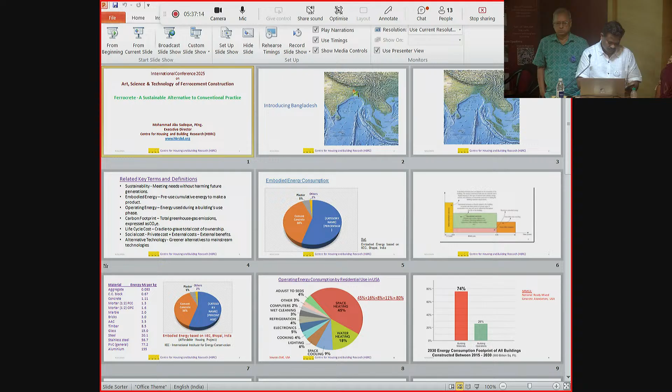Okay. Just in a few seconds, I want to introduce Bangladesh to you. We all know Bangladesh is a small country between eastern India and western India. It's a disaster-prone country, with all types of disaster; what we call a supermarket of disaster, because of its geographical location.

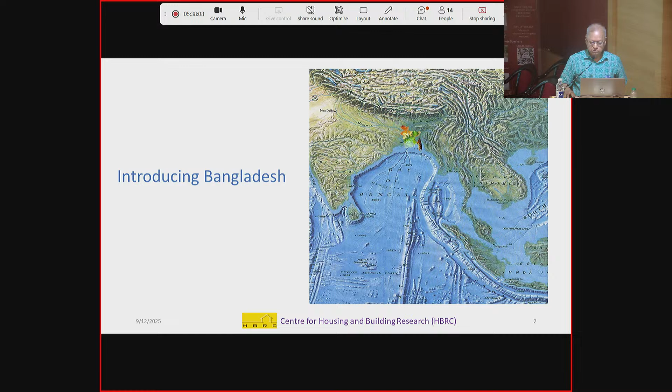You see, this is the location of Bangladesh, and this Ganges river basin, this Brahmaputra river, and this Himalayan tectonic plate boundary all make this small country vulnerable. So actually ferrocement might be the best option, the best opportunity for countries like Bangladesh.

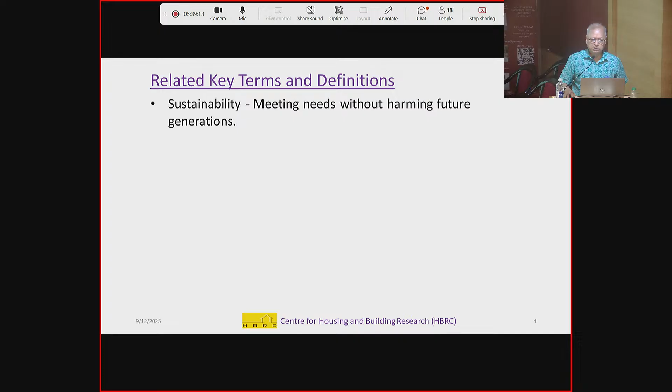Let me introduce and recap some terms and definitions related to this presentation. Sustainability, as we understand it, is meeting needs without harming future generations. We love ferrocement mainly because it is a sustainable technology. Embodied energy is the pre-use cumulative energy to make a product.

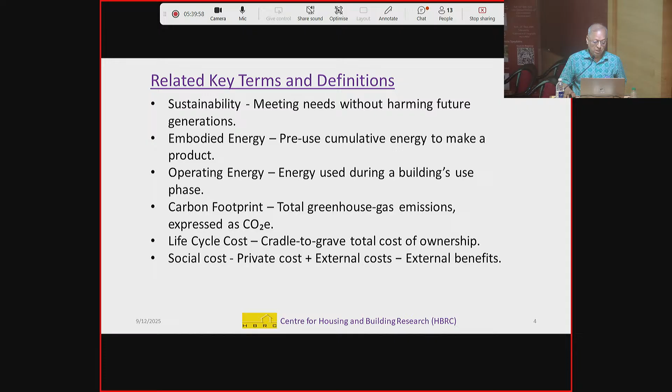Operating energy is the energy used during a building's use phase. Carbon footprint is total greenhouse gas emissions expressed as carbon dioxide equivalent. Life cycle cost is cradle to grave, total cost of ownership. Social cost is the private cost plus external cost minus external benefit.

Finally, alternative technology: a greener alternative to mainstream technologies, because anything different from the conventional one is not alternative technology. Alternative technology is the greener alternative.

So, embodied energy consumption, with an example from Bhopal, India: the Bhopal affordable housing design solutions. Brick contributes the major energy and carbon footprint of a building if we use brick. Cement is 38%, brick is 55%, and plaster and others a small amount.

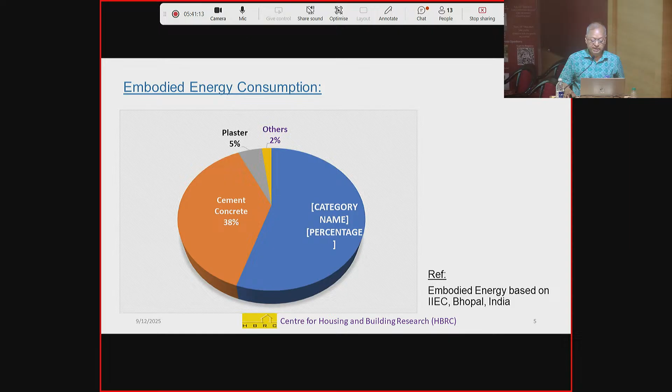Regarding material selection and energy consumption, I believe the architect can play a major role in making a building sustainable. It's not the engineer, it's the architect, because building material selection is the architect's job. The engineer mainly selects the structural system and frame, but most non-structural and finishing materials are selected by the architect. So the architect can play a vital role in making a building energy efficient and sustainable.

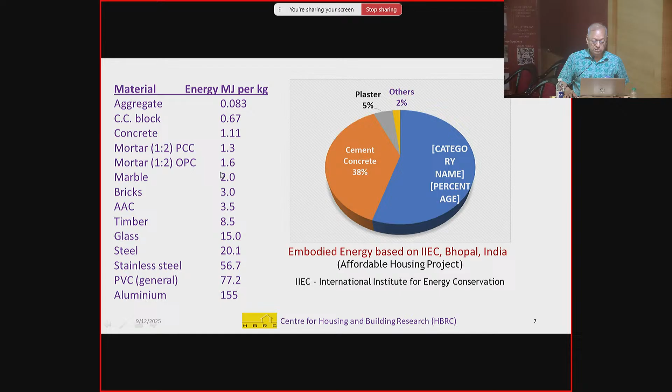So if it is 1:2, the energy consumption is 1.3 if we use composite cement. But if we use ordinary Portland cement, then the energy consumption is more, 1.3 to 1.6, because we know that in composite cement maybe 30%, 35% is fly ash or blast furnace slag, which does not contribute as much carbon as clinker. So considering these things, we have to select our building material and technology.

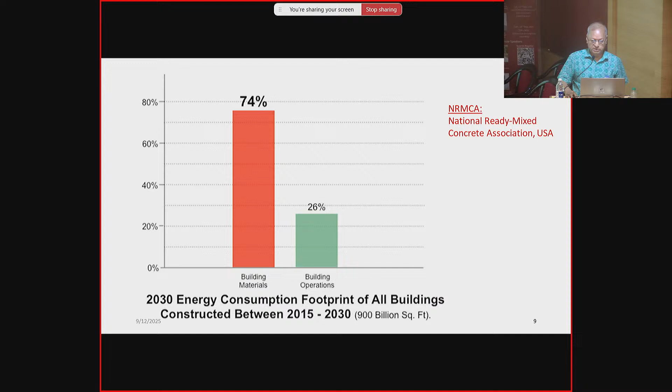And this is from the National Ready Mix Concrete Association, USA: for 2015 to 2030, building material embodied energy is 74%, and building operation energy is only 26%, even in the USA.

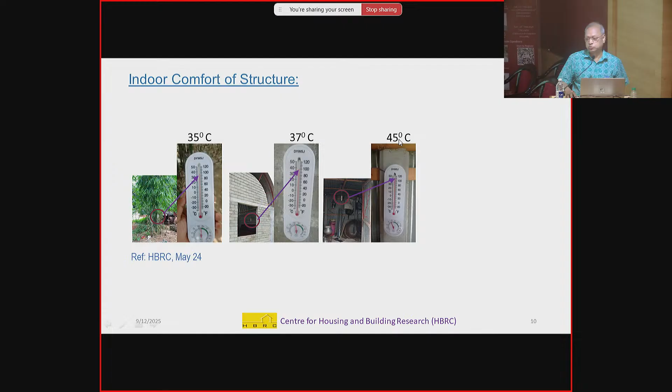Indoor comfort of the structure is my organization HBRC's research work. This is a bamboo bush, and in the bamboo bush there was a thermometer. There was another thermometer under the ferrocement roof, and another under the CI sheet roof and wall. Below the bamboo bush the temperature is 35, inside the ferrocement roof it is 37, and more than about 75% of houses, especially rural houses in Bangladesh, have CI sheet roofs. That is why it's most important for us to have an alternative to the CI sheet roof. Under the CI sheet roof, it is 45, 10 degrees more. So it's very much unhygienic.

So my organization HBRC suggested these houses, but this concept is not yet widely applied, though day by day people are accepting this concept. Because usually in the cyclone prone area, people are not willing to go to the cyclone shelter, leaving all their valuables, and there are other social problems also.

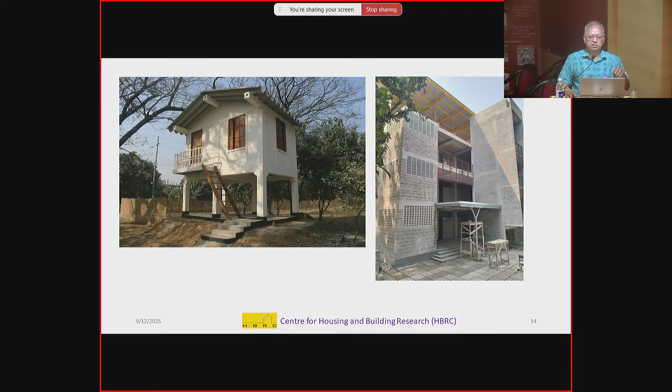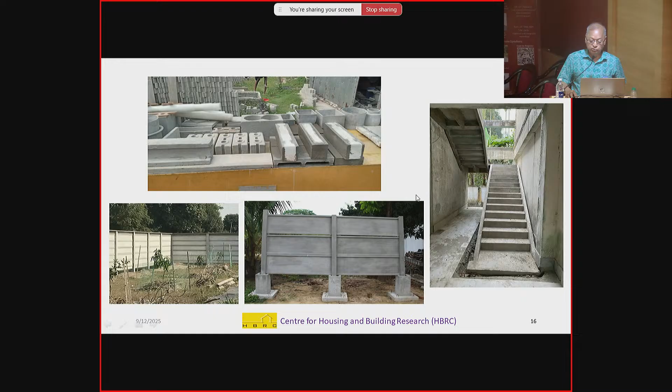We at HBRC work mainly with the rural community, because in Bangladesh, a lot of engineers and architects are there to support the rich man's house, but there is no architect, no engineer for the poor. Though we engineers and architects in Bangladesh studied in public universities with the poor man's money, after passing out we work for the rich people, not for the poor people. I don't know about India. So from that point of view, my organization is dedicated to working with ferrocement for the rural community and low-income community.

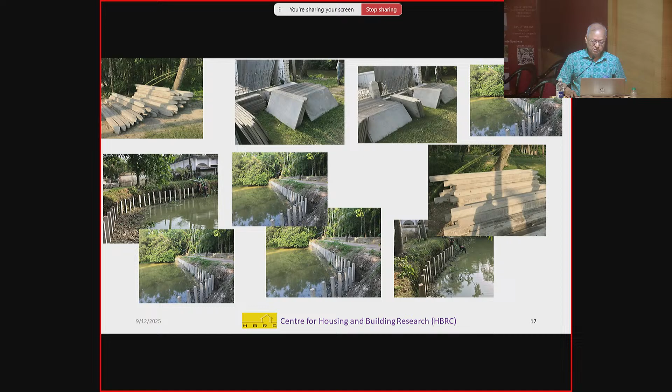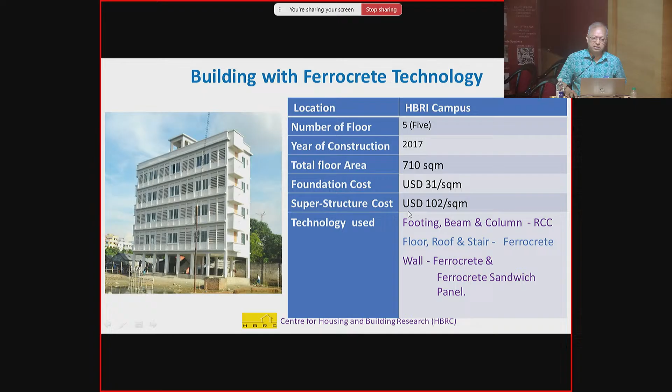These are the precast ones, and people like CGI sheet in the rural area very much. So we have recommended this corrugated ferrocement sheet for the rural people. And this 5-story house: the footing, beam and column are RCC, and all other things, the floor, staircase and others, are ferrocement. After analyzing, we found 32% less carbon emission compared with the conventional one, and a cost saving of 30%. So why don't we go for ferrocement?

And this is a rural house. This is a government house for the homeless people, and this is the alternative from our organization. With the same area, we made a comparative statement against the semi-permanent one. We call it semi-permanent because the floor and wall are permanent, the wall is made of brick, but the roof is CGI sheet. It's not permanent, but the ferrocement one is permanent.

So if we compare, the private cost for the ferrocement is 85% of the conventional one, and energy consumption is only 43% of the conventional one. Carbon footprint is 35%. Social cost is 80%. Life cycle cost is only 35%.

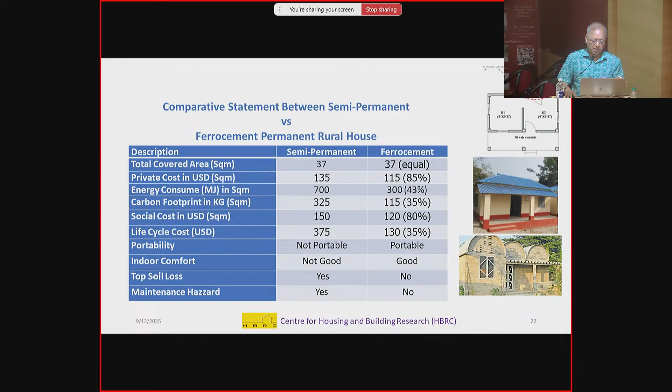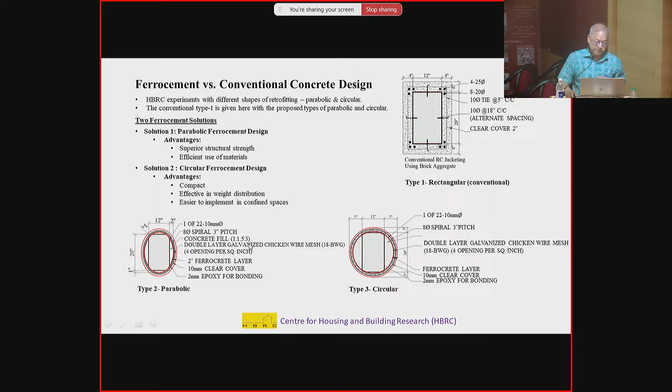Recently we designed for retrofitting. Conventional retrofitting is concrete jacketing all around the column, and now we are proposing ferrocement jacketing. What we found is that ferrocement jacketing in oval or circular shape gives a better result, and here is the detail of the ferrocement. Thank you very much.

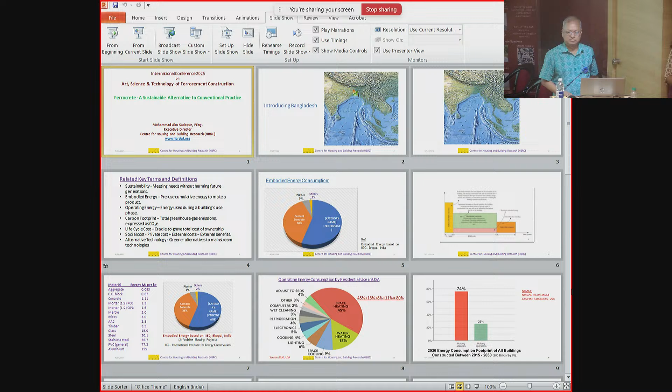I want to add something. We have already given recommendations for the BIS code, and we can make that booklet available tomorrow. I can show it to interested people here tomorrow and bring it along. So many questions are there, but we can answer them later.

That was quite an interactive session. May I call upon Dr. K. Sundaram to the stage? He wants to say a few words.

First of all, I'd like to thank Sadeque ji for his very wonderful presentation. My message to all the youngsters here is to understand an important part he mentioned: when we become engineers or architects, we should not just end up working for rich people. As he said, he has worked for poor people's housing in Bangladesh. Please give him a big hand for this.

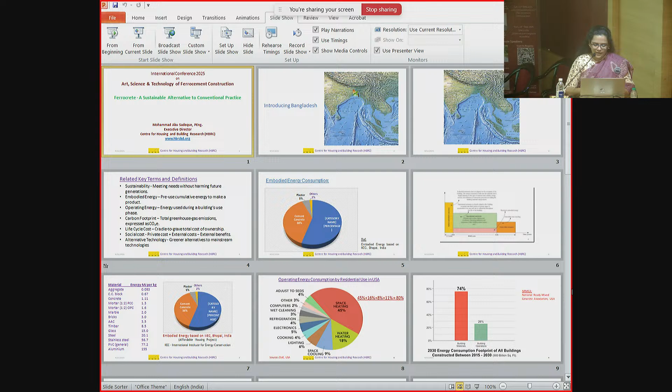Pointer is there. I'll just arrange for that, sir.

Just copy it on desktop. You can copy the entire folder. Okay. That's it. I don't know what's happening. Your collar mic. I like it.

Pointer. Yeah, pointers. She's arranging. You can just right click, copy text.

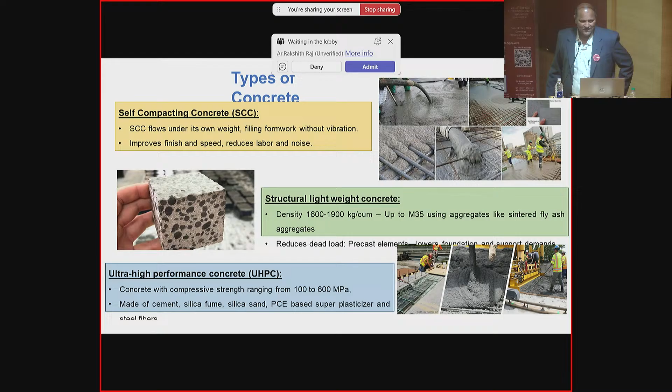If we look into the different types of concrete today, we have self-compacting concrete, which is most widely used in infrastructure development. L&T is by and large using this SCC. The concrete is being pumped to even the 50th or 60th floor, which means you have to have a proper rheology, the viscosity of the concrete. So without any compaction, we can just use self-compacting concrete.

I'm just giving the different types of concrete for the purpose of keeping architectural students in view, because they should know which type of material is to be used for which applications. The structural lightweight aggregate is also there. There again you have non-structural lightweight and structural lightweight. Non-structural lightweight is basically achieved by changing the type of aggregates. So we have LECA aggregate, lightweight expanded clay aggregate, which gives a concrete density of around 600 to 900 kg per meter cube. It can be used for non-structural purposes.

Whereas we have sintered fly ash aggregates, which is being manufactured in Odisha, at a place called Cuttack. Using these artificial aggregates, we can make structural lightweight concrete also, and it's being used extensively, and we can make concrete up to a grade of around M35. There are specific codes for this, and we also have ultra high performance concrete.

Today, mostly we will be using M20, M30 kind of grades. We are now working on M150 grade concrete, and we have achieved it. Even now we are planning for 180, that is 180 Newton per millimeter square, which will be predominantly used for long span infrastructure elements, precast elements, and for pre-stressing.

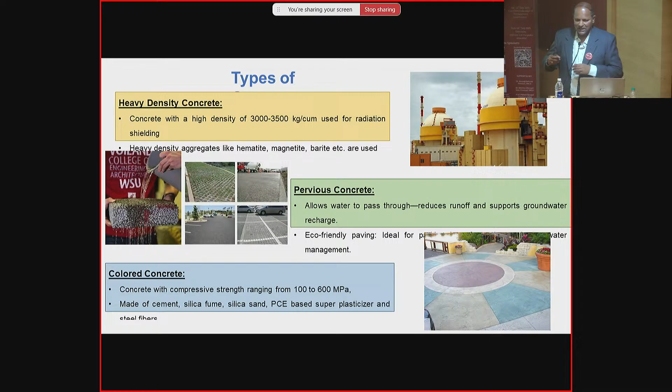And we have pervious concrete. Particularly for architectural students, we will be interested in rainwater harvesting, where we use paver blocks in the outside environment. Instead of paver blocks, you can have concrete itself with no fines, but a gap graded aggregate, which allows water to percolate while giving a rigid surface. You can use it for parking kind of applications. So this is also coming up, and we are using it in many projects.

And colored concrete - architects prefer colors. So basically 4 or 5 different colors can be used by adding pigments into the concrete itself, which will last for years. In fact, L&T has done one white concrete building in Delhi for the Shiv Nadar group, HCL group, where white cement is used, white aggregate is used, that is dolomite, and white titanium dioxide is used as the pigment to bring the white color. So likewise, it is possible to have different types of colored concrete. Of course, it involves cost also, so based on that, we can do it. It's not a painted one.

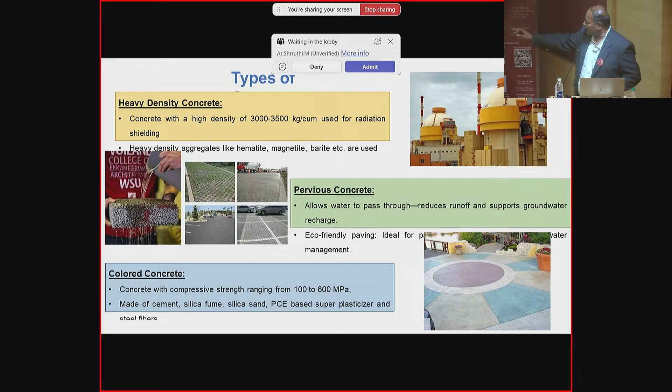Once we know what type of concrete to be used and what type of cement to be used - because it's a big science, people have to know the use of each type of cement - we have different types of cements: OPC, PPC, PSC cement, PCC cement. So which cement is used for which building? For example, if your ground contains more sulfates, then you have to use sulfate resisting cement, or you can even use cement with GGBS, that is ground granulated blast furnace slag. If you are focusing on carbon emissions, you can use more fly ash.

So for this, you have to use different kinds of admixtures, mineral admixtures. Next, coming to the rebars, we know mild steel is there, which has higher ductility, but strength is less. We have cold twisted bars, mild steel bars, but in a ribbed form that gives more strength. And the third one, most extensively used in the market today, is the TMT bar, thermomechanically treated bar.

The bar is heated and suddenly cooled, made to undergo lower temperatures, which is called quenching, by which the rebar will have an outer layer which is very strong. Suppose you have a 25 mm diameter bar, there will be an outer layer which is not visible to your eye, about 0.1 times the diameter of the bar. That gives the strength. The inner core gives the ductility. So both strength and ductility can be achieved by using a TMT bar, which is predominantly used today.

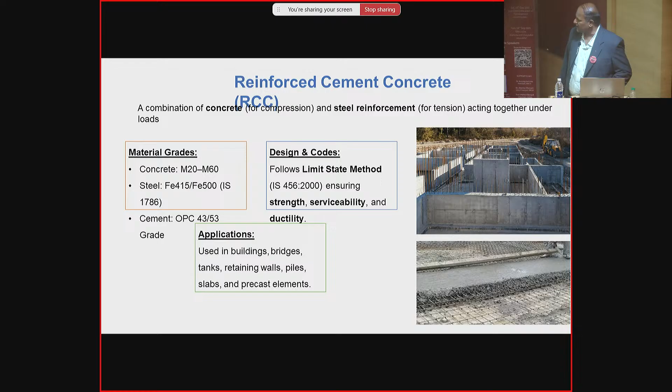In addition to steel, today people started using fibers also. Different types of fibers: steel fibers are used mainly to bring more toughness, because concrete is very brittle. If you want to increase the energy dissipating capacity, you have to add more steel fibers, which bridge the internal micro cracks, thereby dissipating more energy. So bringing plasticity to the concrete is done by adding a fiber.

And polypropylene fiber is used in concrete where fire resistance is to be increased, mainly for high-rise buildings, for grades of concrete above M80, M90 and all. Higher the grade, lesser the fire resistance. So to increase fire resistance, you use these polypropylene fibers around 0.1 kg per meter cube, so that during fire these fibers melt at 160 degrees, and give ways for releasing the pore water pressure developed inside the concrete.

Carbon fibers are also used. Glass fibers are basically made from silica sand, heated to around 2200 to 2300 degrees centigrade, into a molten form, and made into fiber using the fiberization technique. Organic fibers, nylon fibers, polyester fibers, all are there. Sometimes fibers are used to reduce the shrinkage of concrete.

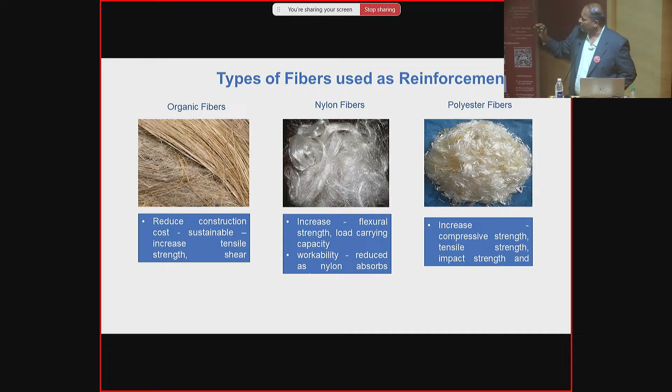You might have seen, for a larger horizontal slab, during peak summer, once you lay the concrete, within 4 to 5 hours you can see cracks popping up on the top. It is due to shrinkage, called plastic shrinkage. To avoid that, you can use these kinds of fibers so that they take care of the stresses developed. So each one has its own purpose. This has to be kept in mind, right?

So next one is, as I said, this glass fiber reinforced polymer, GFRP bar, which is now widely available. Dextra is a company which is giving these fibers. This can also be used. It is completely corrosion free. Whereas the conventional steel is corrosive, it has to be treated separately, whereas this is corrosion resistant, but it has a lesser Young's modulus. That is the problem; you can see the modulus of elasticity is only 40 to 50.

The meaning is, suppose you have a beam with conventional steel; if it deflects by some 5 mm, if you replace the steel by this GFRP bar, the deflection will be more, whereas the fire resistance is very less. So it cannot be used unless you take care of the fire resistance. This cannot be used, right? So these are all the different types of bars available.

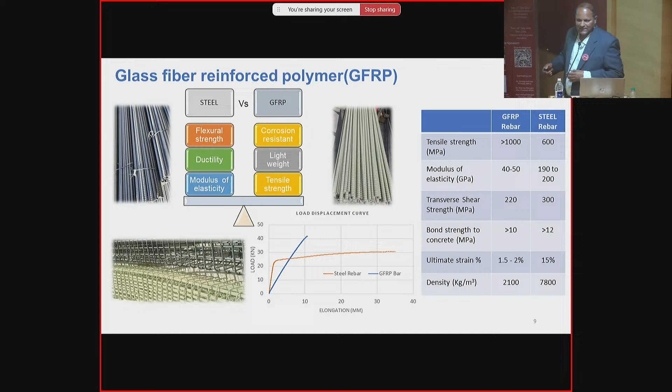You can just see the load deformation graph. The steel bar is having a larger plateau, right? Usually this portion is having larger stiffness. If the larger plateau, horizontal deformation is there, that means that bar is able to undergo longer elongation, able to dissipate the energy in the plastic zone. Whereas for GFRP bar, only a straight line is there; that has more strength, but there is no ductility. So under the event of earthquake, these kind of structures will not dissipate the energy.

So we have to judiciously use where to use the steel bar, where to use the GFRP bar, where corrosion is important, where fire resistance is important. So keep all those things in mind. It's not just a rebar, purchasing it and placing it in the member.

Now coming to the ferrocement, in fact, it is about 5 decades or even more old technology. It has been used mainly for thinner elements. If you look at shell structures or folded plates, for larger spans, if you want to have a roofing, thickness can be reduced. It can be in a curved form, so that under the load, the stresses generated will be in plane. The out of plane bending will not be there. So wherever there is a member which is subject to in-plane bending due to the external forces, the ferrocement or textile reinforced kind of structures will be useful. So where it can be used goes to the extent of your imagination.

Even for metro piers, we are now exploring in L&T. We have huge scaffolding and formwork for the piers. Typically, if you see the metro piers, they have a size of 2 meter by 2 meter, right? It occupies a larger space. Instead, we can have a ferrocement formwork panel of about 30 mm or 40 mm thickness. It can be placed and you can keep the reinforcement, pour the concrete. It becomes a sacrificial formwork, right? So those kind of things can also be thought of.

So similarly, it can be used for these kind of roofing structures. If you see the applications, mostly it is for curved structures, where the stresses will be distributed in the form of skin stresses, that is in-plane stresses, right? It has very limited applications for flexural members undergoing bending out of plane. For in-plane bending, it is best, right?

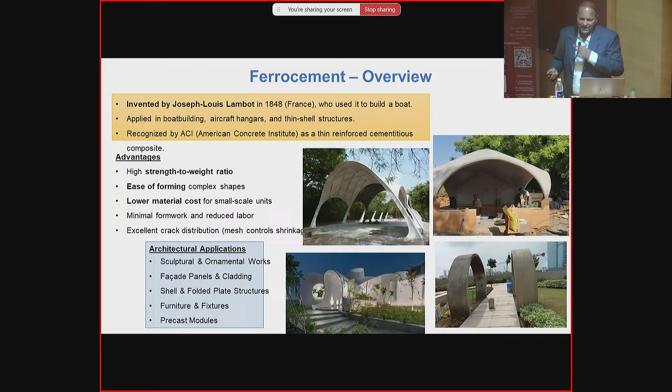And next, textile reinforced concrete is the evolutionary form of ferrocement. Whereas in ferrocement we use metallic reinforcement, here it is non-metallic reinforcement, which means it is free from corrosion, right? Now we are working extensively on this product. We have implemented it in some of our projects also. We are getting the fibers from Saint-Gobain, right? So it is again similar to ferrocement. Only thing here, in place of the steel mesh, it is a TRC mesh, right?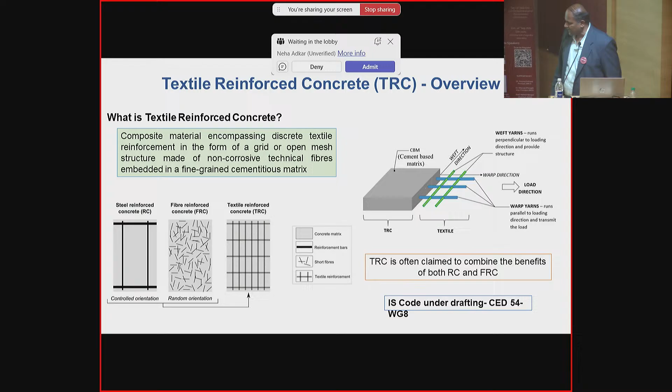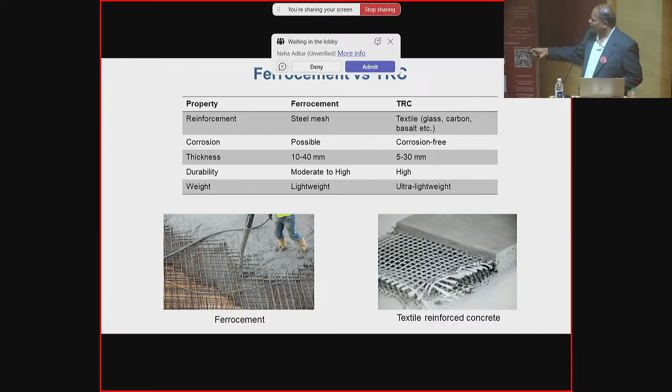Some of the features of textile reinforced concrete: it is very lightweight, non-corrosive, very high tensile strength, high elongation. Though it does not have ductility, because it's a glass reinforcement, it has very high strength. So it exhibits a lot of elastic behavior within the elastic limit and high Young's modulus. You can see the comparison between ferrocement and TRC: there steel mesh is used, here it is textile reinforcement, that is glass, carbon or basalt. There corrosion is possible; here it is corrosion free, and thickness, all these things are given.

And different types of fibers are available. There is alkali resistant glass fiber, which is a little costly. Now what is extensively used is E-glass, electric resistant grade glass. That glass is 1/4 of the cost of the AR glass, and it is available from the vendors. Carbon fibers: this carbon fiber reinforcement is mostly used for retrofitting purposes, if you want to increase the strength of existing columns or existing slabs, because carbon has a very high strength. And AR means alkali resistance.

So one thing we need to understand is, in case of a steel bar, the destruction of steel is due to corrosion, either carbonation induced corrosion or chloride induced corrosion. Whereas in case of these glass fibers, the failure mode is by a method called alkali silica reaction. These glass fibers have a lot of reactive silica, because they are manufactured from silica sand, which is heated to 1200 degrees and suddenly cooled. So this contains reactive silica. When it is in contact with alkaline material, there will be formation of alkali silica gel at the surface of the fibers, which leads to the failure or deterioration of this concrete.

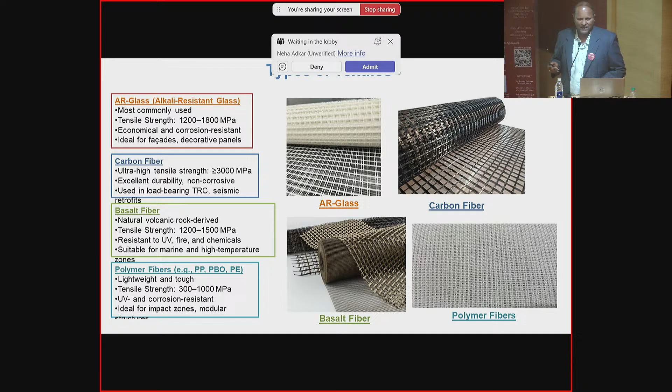So what we have to do is coat those fibers with an alkali resistant coating, that is epoxy coating or SBR coating, or you can use the alkali resistant glass itself. Basalt fibers can also be used. So there are different forms of fibers, but most widely used is the glass fiber, because the cost is very less.

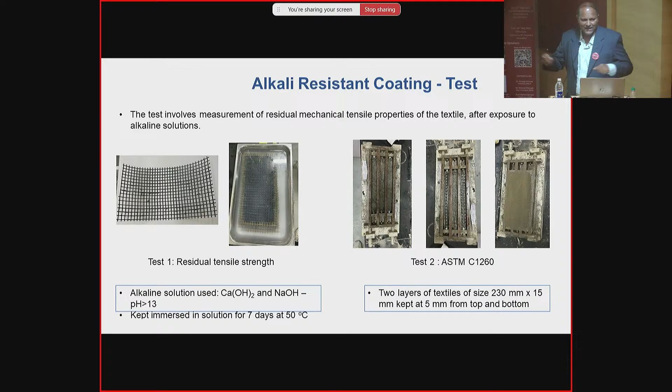These are some of the tests used to find the durability parameters of the fibers, that is residual tensile strength. The fibers are immersed in a highly alkaline material, typically having a pH of around 13.5, for about a week, and then tested. So we find the strength before and after, how it is reduced. Of course it will be incorporated in the upcoming code. And this is the typical test done for measuring the elongation of the members, called the ASTM C1260 test.

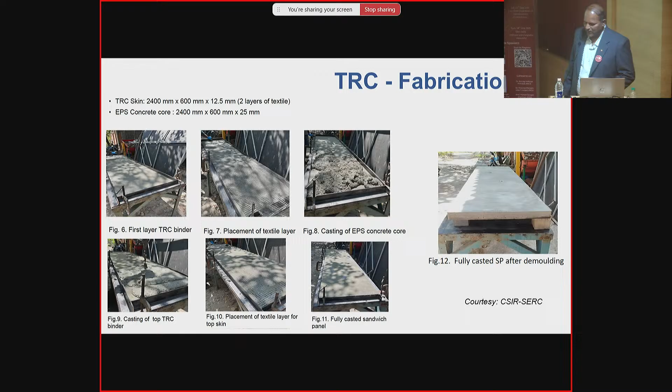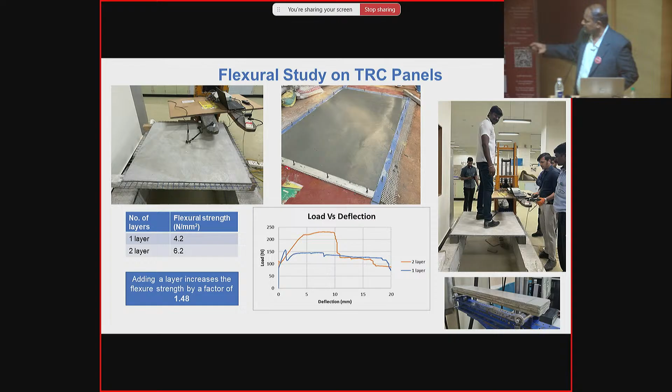You can just see a person who is standing in our laboratory, just to get the feeling of how it is able to take the load. And we have measured the deformations also under the load. You can see here, though the fiber is a brittle fiber, there is a large plateau. This is called large ductility. So these fibers, even though brittle, are able to give large inelastic deformation under the load. So this is the peculiar nature of these TRC panels.

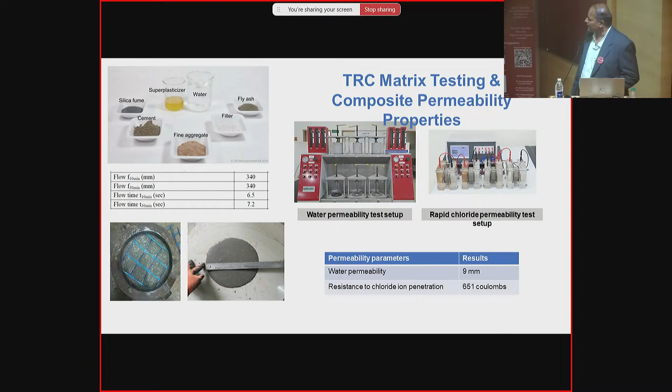And since each fiber is composed of a lot of filaments, the breakage of one filament will not lead to sudden collapse. It will distribute the loads gradually. That's why it is able to take more load. These are some of the test setups we have done to find out the permeability of the concrete. And we have one requirement peculiarly for a lift irrigation project.

L&T is doing a lift irrigation project in Odisha, where for distributing the water to the fields, we will have a lot of bigger controlling valves, which control the flow of water. That occupies a space of around 2.5 by 1.5 by 2 meter height. Initially we thought of having concrete rooms or steel rooms. Since there are 3,000 such rooms to be transported and installed in different villages in Madhya Odisha, we thought we can have precast members.

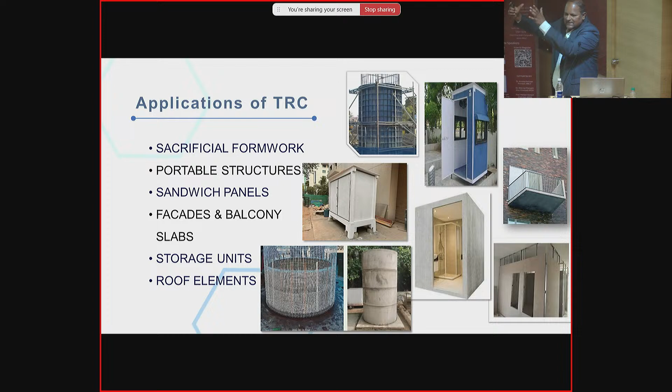Now we are thinking how to use TRC for constructing large piers for the metros. You can insert it like a plywood formwork. You can make a 40 mm thick square or rectangular formwork, place it, keep the reinforcement, place the concrete, and it becomes the final formwork. That is called a sacrificial formwork. We are also trying to use it for portable structures, security cabins, partitions, sunshades, and balconies. So it can be used in many places. Only thing, you have to judiciously design the correct mix and select the correct fiber; with proper design it can be used.

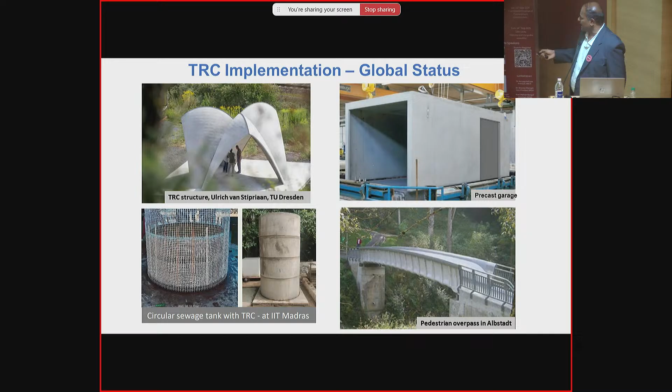Globally it has been used, for example at the Technical University of Dresden, Germany. I have been to this university, and they have built mock-up structures using TRC. This is a precast garage, and several applications have been done.

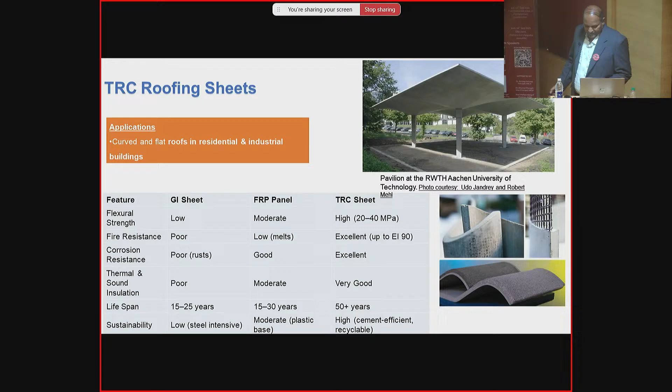These are all some of the applications, because architects may be interested in having these kind of things. And of course, this is now possible with your 3D printing also. And by using TRC panels also you can do it, or even you can use TRC as a fiber with the 3D printing mortar. So that can also be used, right?

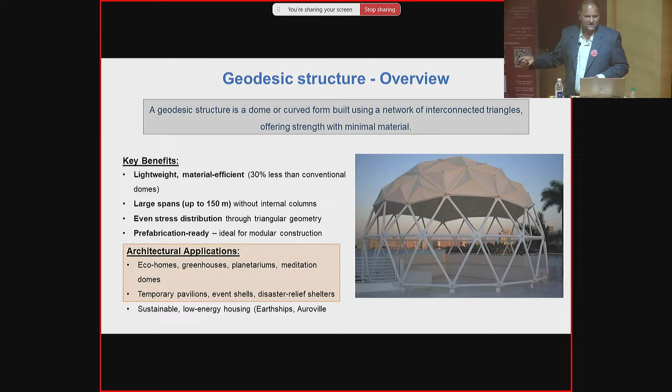So even we can use it for the geodesic, where the load is transferred through this triangulated framework. These infillings can be used by using this Ferrocement, or even the TRC also can be used here. So just I am giving the different applications where we can use this technology. This is being used in foreign countries, urban footprints, and particularly it is for the facades it can be used.

In fact, there is one Pune-based industry, Reina Industries. They are developers of this TRC technology. I had interaction with him also. In fact, they are making all these kind of facades even for L&T also, and you can just see how it has come out.

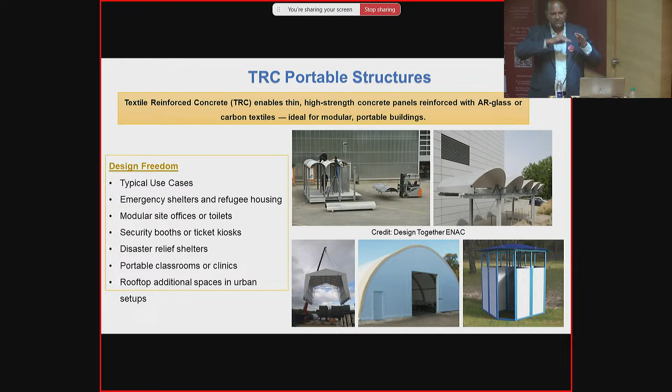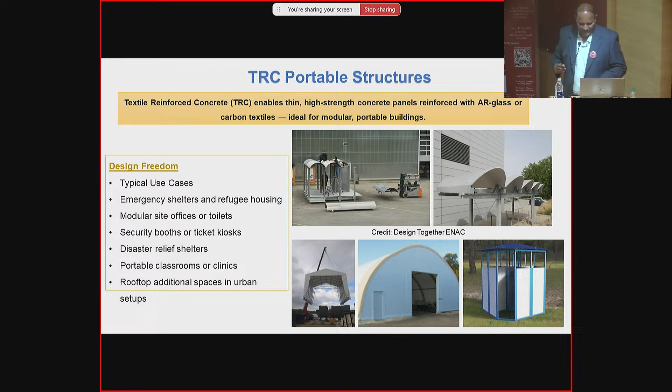So portable structures, Kalyanasam sir, you are telling now. So this can also be used in portable structures, and for airport hangars, which typically have larger spans, there also we can use it. In fact, for the industrial buildings, normally we will be having steel trusses over which we will have a galvalume sheet. Instead, you can have a TRC panel itself as shell structures, so thereby you can avoid these trusses and all, right? We can use it, of course, with the proper design calculations.

You can just see some of the architecture elements. In fact, not only for the architecture purpose, unfortunately, I am not able to show the video. This can be used for the retrofitting of the structures also. As I said, the carbon fibers can also be used.

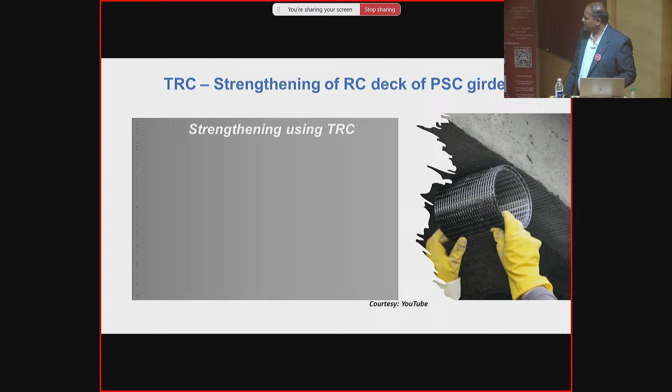This video is actually showing the retrofitting technique adapted for the bridge decks. So there are pre-stressed concrete beams over which the bridge deck is there. The thickness is around 150 mm. But the strength of the bridge deck slab is to be increased. What they have done, they have fixed these carbon fibers at the bottom and sprayed the mortar, and they have proved that the moment carrying capacity is increased. So that is the video, but due to some technical issue, I'm not able to show it.

So even it can be used in 3D printable concrete also. Today, a lot of works are going on in 3D printing. As you are aware, in fact, I am very happy to see some of the works in this college. They have printed many structures using the clay, but L&T has done a 3D printed building itself. In Bangalore, we have constructed one post office building. Probably you might have seen in newspapers. So 3D printed building. In Kanchipuram, in Tamil Nadu, we have constructed a G+1 storey building.

In fact, we have collaborated with IITM as early as 2016 itself to construct the first Swachh Bharat toilet using 3D printing. Now we have constructed one DRDO building in Madhya Pradesh. We are now thinking of using 3D printing for a 7-storey building. But only thing is, printing is okay, but how to place the reinforcement in the wall? That is one key challenge.

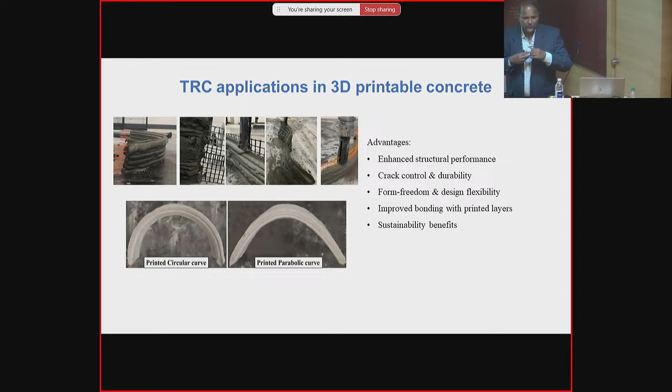How to design the concrete mix? Because in 3D printing, the main challenge is to design a flowable mix. The mix has to come out, that is called extrudability. It should remain in its same shape, that is called buildability, right? It should be flowable. So all are contrasting properties. So it has to be properly designed. That is called the rheological characteristics of the 3D printable concrete. So we have done those works and we have published many papers on that.

So once you use this 3D printable concrete, you can use these fibers also, because it is highly flexible and the strength is very high, and you can manually place it, the strength will be more. So for architectural students, I even suggest you make one mock-up structure in your campus itself using a combination of 3D printing plus TRC fibers.

So these are all some of the structures that could be done with 3D printing. The main advantage of 3D printing is you don't need formwork, and the material wastage is very less, and you can do it the way you want. So that way you can do it. This is the bench, garden bench kind of things.

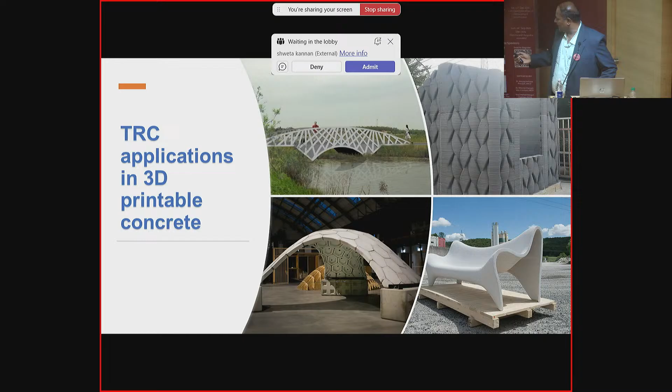I think I have given different flavors of what textile reinforced concrete is. Of course, it is a form of ferrocement, a non-metallic reinforcement. If you understand the material characteristics of cement, concrete, and fibers, and which fibers have to be used, and if you do it properly, then it can be used for any structures. With this, let me conclude my presentation.

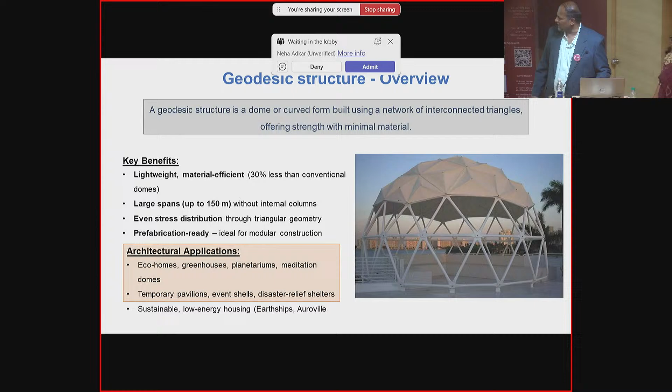Very good, in fact it is a very good candidate for canal lining. We have done the test called water permeability test, and I think I have shown one video also. The water permeability is only just 9 mm. You can see here, permeability parameters, water permeability is just 9 mm. Actually, the thickness of this element is around 25 mm, in which 9 mm is the penetration depth. This is under a pressure of around 5 bar for 72 hours. So once after 72 hours, we break it, and if we measure the depth of penetration of water, it's only 9 mm.

So it can be better utilized, for in situ casting and precast. One more thing to notice is since this fiber is non-metallic, even if the depth is higher and permeability is more, it won't lead to corrosion. Whereas with metallic reinforcement, once it touches the concrete, oxidation reduction reactions take place leading to corrosion. Here with non-metallic, that's not a criteria, but it still maintains because the paste content will be more, so that's what we are achieving.

Another point is, what we have done is only for non-structural purposes, not structural purpose. As I said, if there is out-of-plane bending, for example if I want to make a beam using TRC, it would not be a good candidate because the out-of-plane bending capacity is very less, thickness is less. Whereas if we make it as an outer formwork and fill it up with concrete, so if it is made as a hybrid with concrete and TRC, then it can be workable.

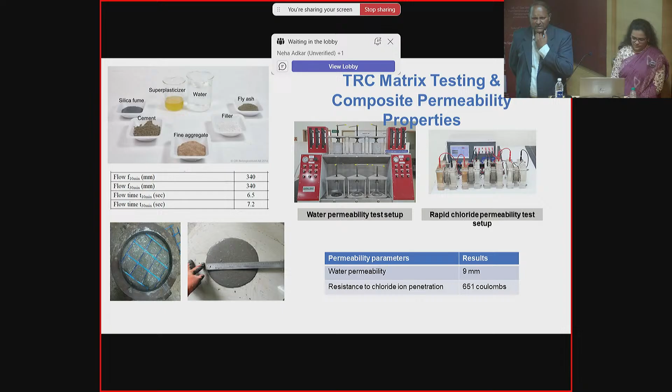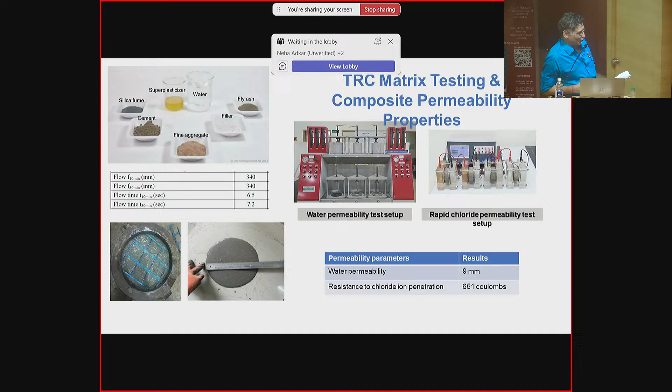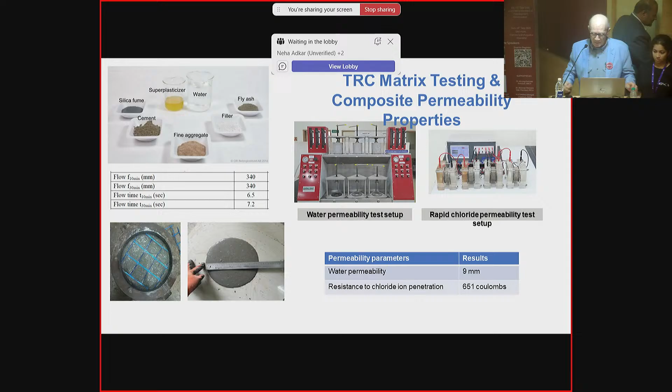Hello, thanks for having me here. I'll try to speak about what this man said I was going to speak about, but I had another idea. Let's see it.

So how do I move the mouse? Does the mouse move? I'll operate it for you. No, I'd rather have me do it. Alright, no problem, does the mouse move it? Yes, just a minute, it's moving. No, it doesn't move. Oh, go back - oh I see, it's opposite. I got it, thank you. Thanks for waiting.

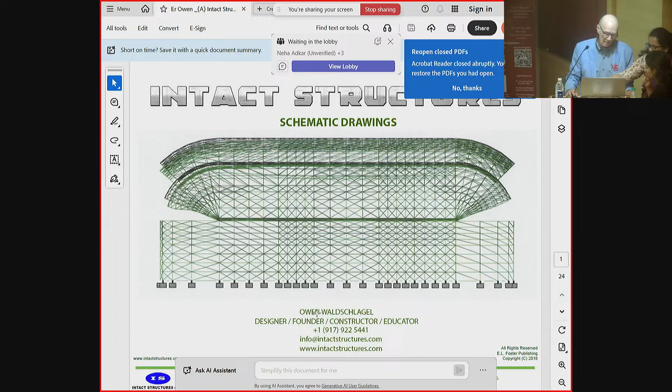This will be a synopsis of a building system called Intact Structures. It's composed of 4 components that can build a genomic array of multiple design configurations, and they're all capable of utilizing ferrocement in ways that I have not seen yet - a couple of times I have, but not much. One way is that the system collects and stores water.

Also, there's the potential of fish farms and biodynamic vegetable farms incorporated in the designs. So here we go - anyway, this is a schematic of a single-family house.

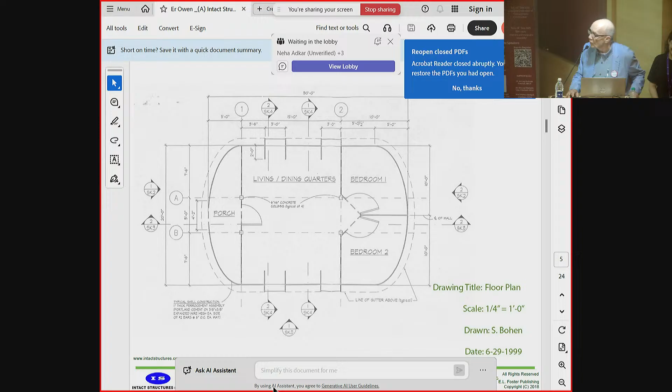There's a thing coming on the screen - I'll ask the volunteer to close it. No, I'll do it, thanks. Anyway, that's the floor plan of a single-family house, which you'll see one that was built.

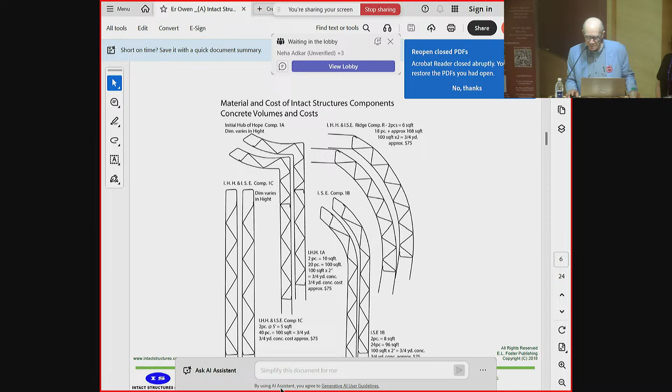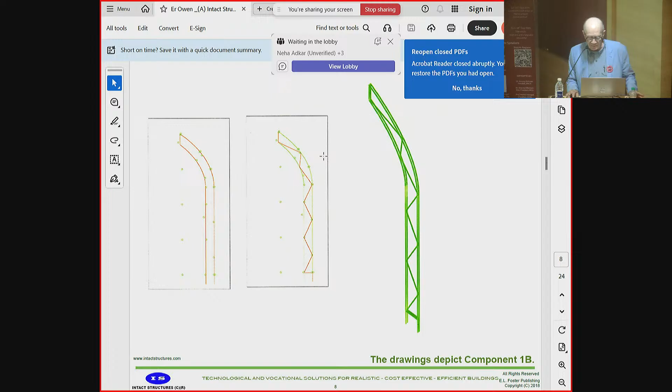These are the components that construct all the designs that you see. As I said, there's 3 there - there's one more, but there's 4 in total, and they do construct all these designs. That's backwards. That's actually a picture of a template - the way those pin points are is how you would fabricate it on a table.

Again, these are some of the components. The one that's missing is what I call a turkey tail, which is an important component. That one right there - it's 5 18-degree angles, and it creates the apex for the elliptical roof.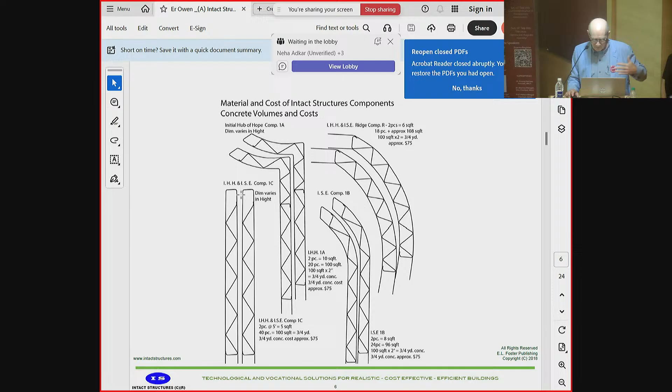Going backwards - this mouse works backwards from the one I use, so it's working backwards again. There we go, okay. This would be a wall section of what I call the elliptical design.

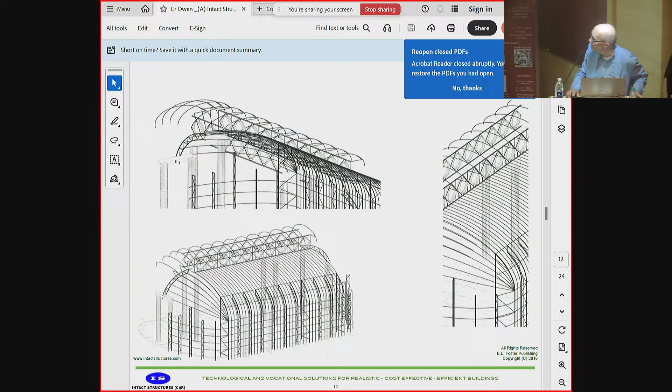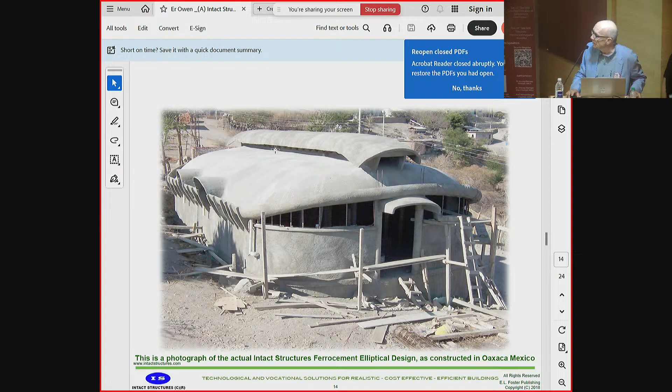There's the actual building that was built in Mexico, more or less from what you just saw. The interesting part of this building is that it was built prior to these drawings. More or less, I drew it out of the rebar in Mexico.

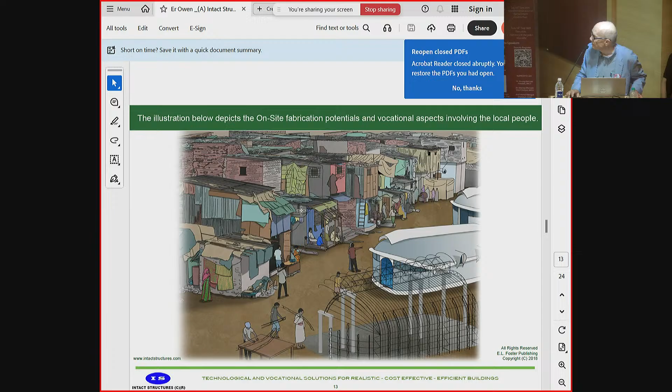Here's a thought: it would be placed in a slum to train the people there to build themselves houses, hopefully interesting them and moving them more physically into those buildings rather than these structures.

Here's the way that something I call the oasis is constructed. I did it this way because everyone was having trouble making an AutoCAD drawing of this design. So there you go, see that? That's what I call AutoCAD, but it was made actually from a photograph.

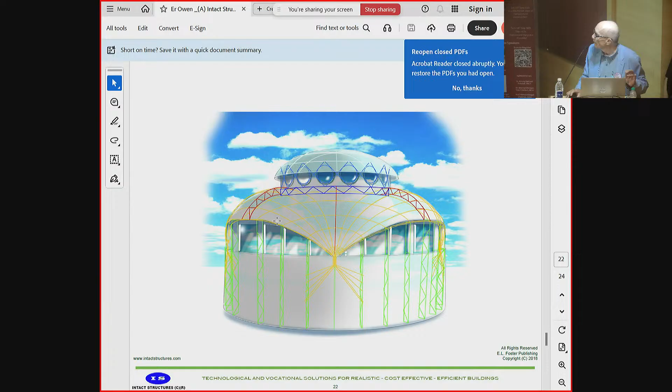Hold on, how come it's not moving? Oh, it's up there, that's why it's not moving. No, we're missing one. All right.

Anyway, this initially was going to be a small medical center, and that's the way it would look with cultured stone on the outside. And this actually is the gutter that I'm talking about that collects and stores water.

And there would be the fish farm created by ferrocement, and that would be a biodynamic farm, which by elevating it the way it's elevated in the drawing, you could place it in an area where the land was contaminated by previous activity, which happens around many slums all over the world.

The land can't be farmed at all, so people can't get involved in any kind of natural occupation. What they do instead is take motorcycles apart or play video games and watch TV. You see the dishes on the roofs and everything. I think it would be better for them to function in a way that gave them food on their table.

It might actually work if you introduce them to it. I have a feeling a lot of people involved in that style of existence have never been involved in other styles of existence. So they're in a trap — the screen is their life, or the motorcycle, or something like that. It's a trap.

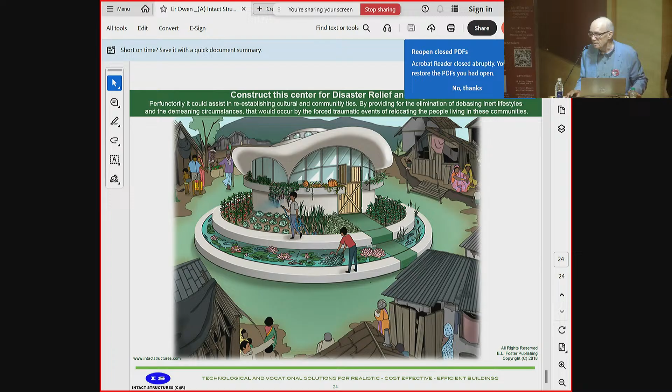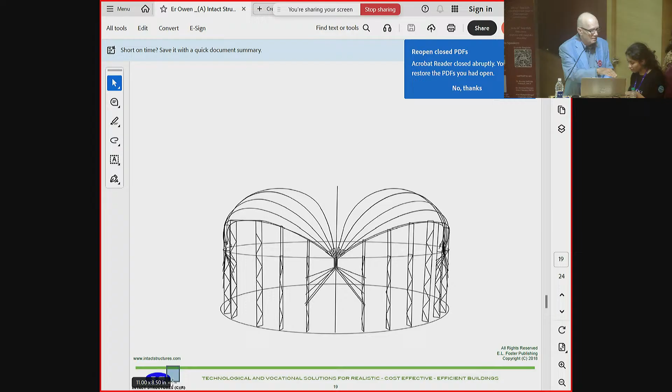Okay, could I go to the next one? I won't be as long as everyone else. I'm almost finished, I'm not as technical as everyone. Could you get me to the other one, please? I'm trying to get to the other. Yes, just give me a minute. There you go, what would be the other? Let's see the names, let's see that one, let's try that. Thank you.

These are illustrations of what those designs could be. I haven't had the luxury of building them yet, and maybe I will or maybe I won't, but I do know what they could do.

And for instance, that one design that looked like this could extrapolate — you just make the foundation footprint whichever way you want. You see, also in this presentation, I think there's a retaining wall that I built that I'll show you. That would be a retaining wall of step farming, sending water down to a village, say.

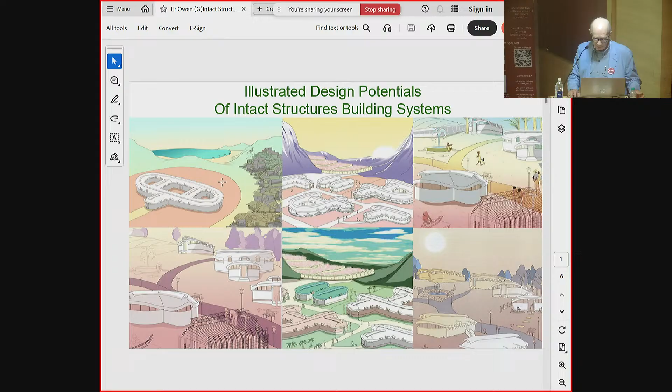These are the same components, and I'm not sure you can see them in a schematic, but someone asked me, could I make a Thai house? I was in Thailand, and I said sure, and there it is.

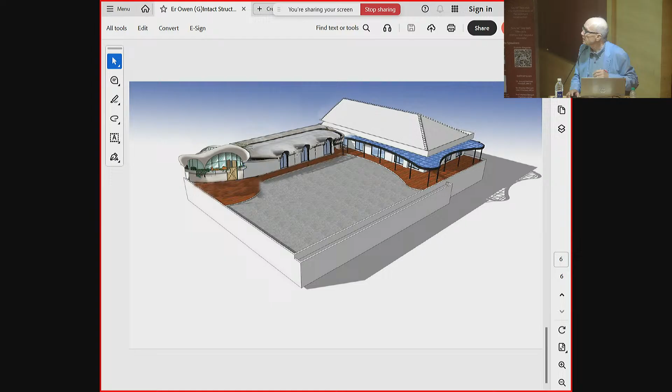This was actually built on a roof in AIT. Unfortunately, I had a medical journey to go on when I was supposed to build it, and I wasn't exactly there after I had laid it out. But I had been to Bangkok and AIT a lot, and this was inspired by intact structures. It's a schematic I had sent them that they could work on, but they built it.